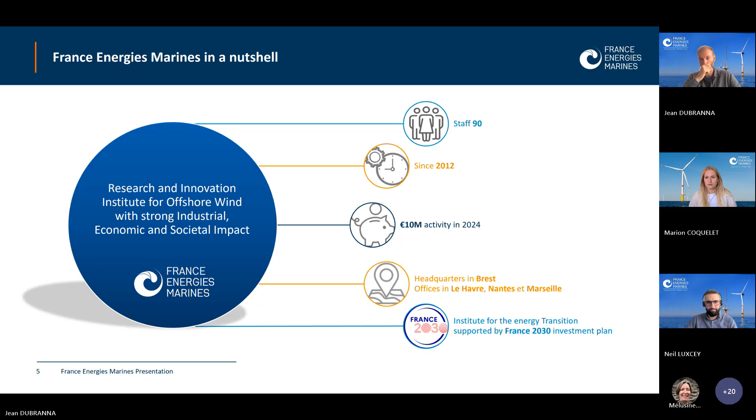In addition to those members, we also work, of course, with non-members. So anyone can join France Énergies Marines projects. That's why we have a lot of other partners in our projects from the industry or the academia as well. And we are working closely with other research institutes abroad as well.

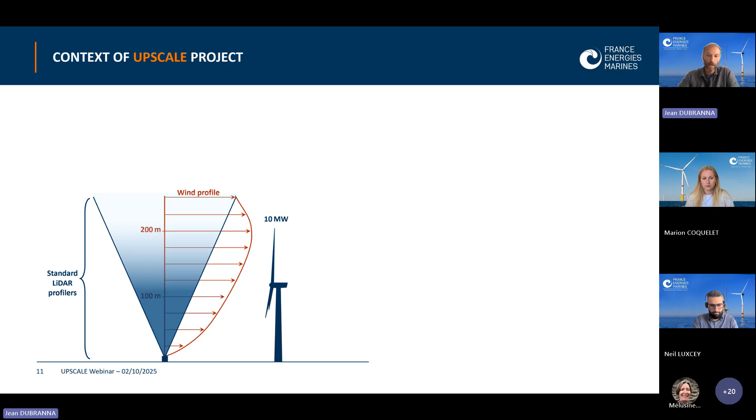But now, as the wind turbines grow larger and larger, not only do they reach altitudes where the standard LiDARs cannot measure anymore, but also where the wind profile is very likely to become more complex. Higher shear, higher veer, higher overall variability in the wind speed through the diameter of the rotor.

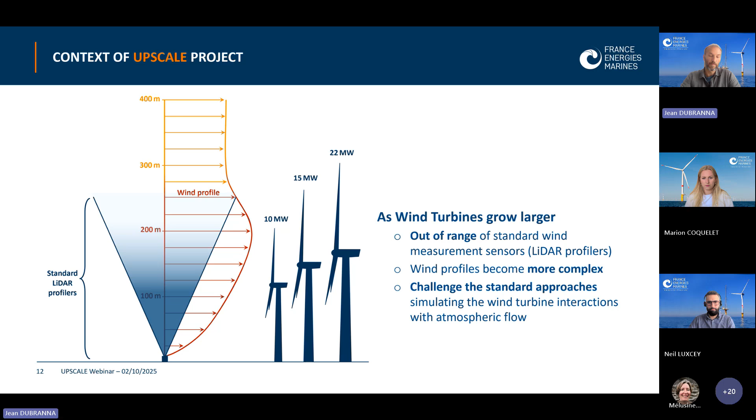This greater variability and this overall greater complexity really challenges the simplifications brought by the standard approach that simulates the wind turbine interactions with the atmospheric flow. And this is the very purpose of the Upscale project, characterizing ever higher wind profiles for accurate prediction of turbine performances.

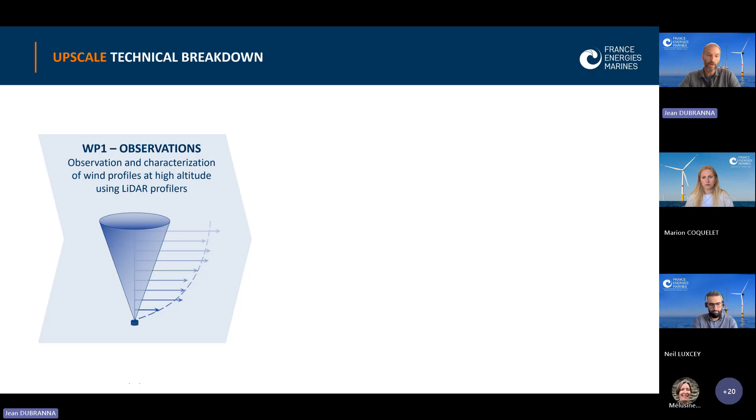Now that you have an overview of the context, let's see how we, in the Upscale project, are planning to technically address the highlighted challenges. So the project is divided into 3 technical work packages. The first one is about observations. We will use a new generation of LiDAR profilers that is able to reach unprecedented altitudes that are relevant even for the largest wind turbines.

Afterwards, in work package 2, Marion will show you how these observations will be used to reproduce realistic wind fields and wind boxes up to higher altitudes. And finally, she will present how the realistic wind forcing coming from work package 2 will be used in work package 3 to assess the wind turbine performances considering a realistic atmospheric flow.

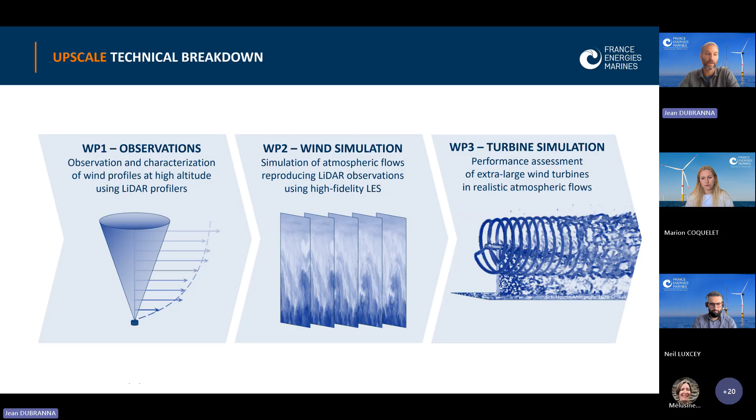The whole project is managed by France Energies Marines and is expected to last 2 years, between early 2026 and early 2028.

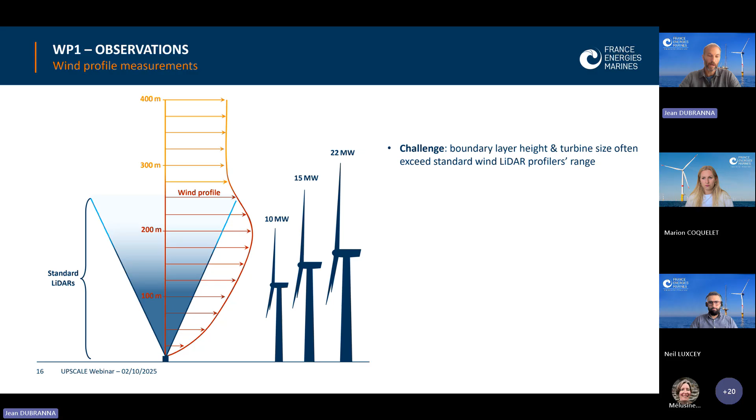Okay, starting with work package 1, which is dedicated to observations. Let's go a little bit deeper into more details. You remember that slide showing that not only the standard LiDAR profilers can't reach higher altitudes, but also the complexity of the wind profile that is increasing with altitude because we are gradually reaching the upper limit of the atmospheric boundary layer.

Well, Vaisala, who is a partner of the project and also a world leader in LiDAR manufacturing, has recently developed a new generation of wind LiDAR profilers that is able to reach 400 meters, possibly up to 500 meters, which is really highly relevant even for the largest wind turbines, as you can see in the slide. So Vaisala offered to provide Upscale with 2 of these new generation LiDARs called WindCube 2.1 XP, and we thank them very much for that.

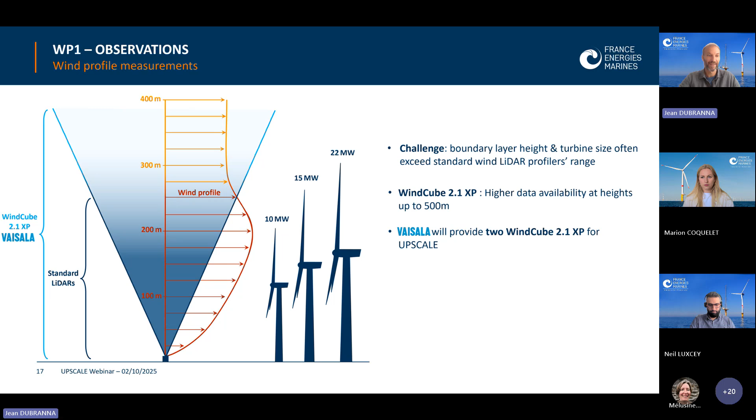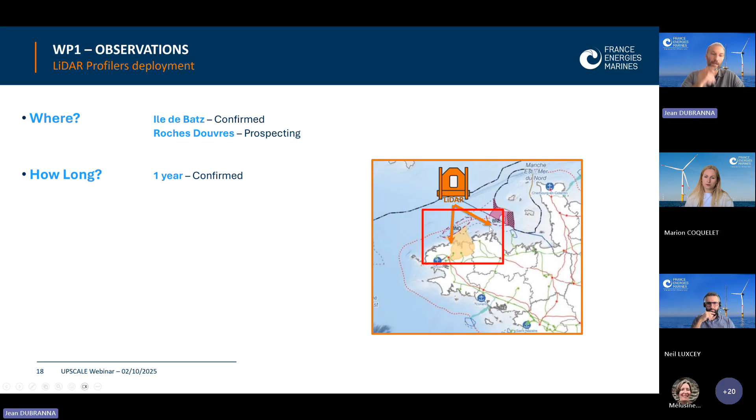These LiDARs are planned to be deployed for 1 year in the northwest of France, that you can recognize on the map on your right. So you can recognize Brittany and Normandy. So one of these LiDARs will be deployed in the lighthouse of Île-de-Batz, a little bit to the west. This position has been confirmed, and the other LiDAR is planned to be deployed in the lighthouse of Roches-Douvres. That second deployment is still under discussion with maritime authorities.

If we focus a little bit more on the measurement areas, you can realize that they have been chosen because they are located close to future offshore wind farm deployment areas, namely Roches-Douvres to the east, although it does not clearly appear on this map, it's a little bit to the east here, and also the BNO, Bretagne Nord-Ouest area, where a capacity of 1 to 2 gigawatts of offshore wind is planned to be deployed, and which is about 16 kilometers offshore of Île-de-Batz, where our first LiDAR will be deployed.

In addition, to secure the relevance of these measurements, France Energies Marines has shown during a preliminary study that there is a 0.95 correlation coefficient between the wind at Île-de-Batz and the wind at Bretagne Nord-Ouest, at BNO. So we are pretty confident that our measurements will be representative of the wind climate of the BNO area. For your information, this kind of LiDAR deployment for 1 year, 2 LiDARs, is worth about 200,000 euros, including all the mission fees, rental costs, and so on.

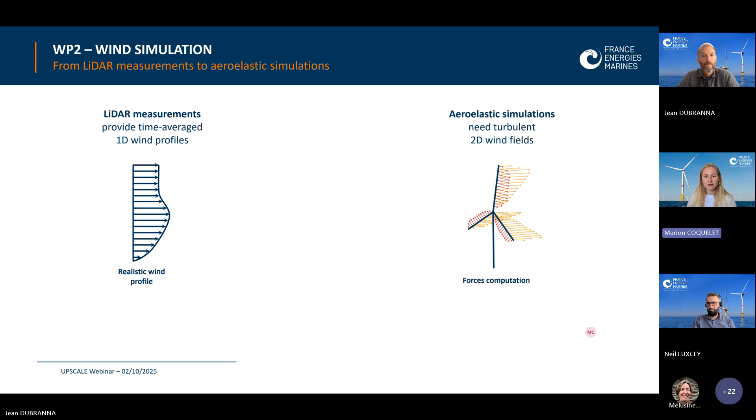So we need a 2-dimensional wind field, and we also need it to be evolving in time, so to contain turbulent fluctuations. So what's missing in between is what we refer to as the turbulent wind boxes. It's a collection of slices of wind fields that we can input onto the aeroelastic simulations. Now we have 2 options that we're considering here to generate those turbulent wind boxes.

The first one is the standard engineering approach, which consists in generating a box of synthetic turbulence. So you get a box of small fluctuations, and you superimpose those fluctuations on top of the time-averaged wind profile that you got from the LiDARs. This is quick and simple. So this is really the positive side of this engineering approach. The drawback, though, is that it's not really physically accurate. Unfortunately, we cannot just linearly superimpose fluctuations and it works.

That's not physically correct. So the other approach that we're really willing to address in this project is to rather use a higher fidelity approach. So the idea there is to say, okay, we measured a column of air in the whole atmospheric boundary layer, can we somehow simulate a full atmospheric boundary layer that would be representative of that? And to do that, we're going to use large eddy simulations. The drawback being, of course, that this is quite computationally expensive and also not that trivial to implement.

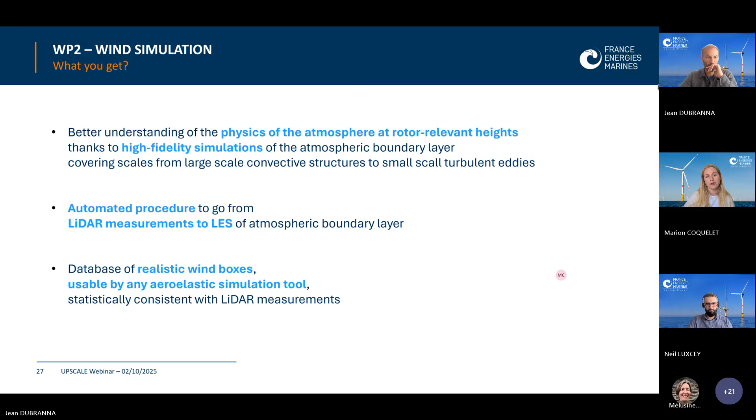Now, of course, this part here is where all the fun is. So we also want to do the exercise, and that's why we have work package 3 here. We're basically going to use all the information that we've built up to perform the simulation of those extra large turbines we mentioned in the introduction to assess their performances in realistic atmospheric flows. And the first thing to contextualize this work package, it's always the same story when you talk about simulation. There's always a trade-off between computational cost and the fidelity of the method. I also highlighted it earlier with the way to generate the wind boxes.

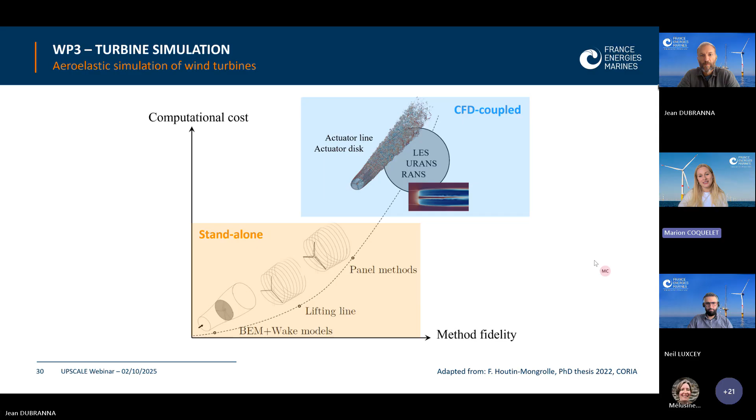And when it comes to aeroelastic simulations, I would say that there are mainly two categories. Either you have a solver that is standalone, that really focuses on the forces exerted on the blades given a specific inflow, but not much more about how the flow evolves downstream of the rotor. The other method is to use CFD coupled strategies where we have an actuator line or actuator disc that represents how the blades react to the flow, but we also have the full CFD running together to provide the evolution of the flow field. Now, again, we really want to go for this high fidelity, so of course we want to try this CFD coupled approach.

And this is what we refer to in those slides as, if it's willing to go. Maybe Jean, I need your help again. I'll try. Let's see.

Yes, perfect. So we want to go for a high fidelity simulation tool chain where we go from the inflow we just discussed before, the LES generated wind boxes. We use an aeroelastic solver which is LES coupled, and in this case we're really happy again to make the most out of the YALES2 platform. Out of that, we retrieve the whole performances of the turbine, so power, loads, but also wakes. With that, we have this whole high fidelity simulation tool chain that can provide us with reference results of how a large turbine would behave in a complex inflow similar to the one that we measured in work package 1.

Now, we understand that not everyone is willing to pay the price of the LES for every case. So we're also willing to assess what the standard engineering approach can do. We're going to be using synthetic turbulence boxes, as I mentioned earlier, as an input for a standalone aeroelastic solver. We're still open on the solver, but probably a BEM-like solver. Out of that, we get typically power and loads. We don't get the wake, unfortunately. And we can compare these results with the high fidelity simulation tool chain.

And maybe we can also do some crosses between the tool chains. So maybe we can try the LES generated wind box in the standalone solver. Is it good enough to represent the complexity of the field to get the right performances? Or is it good enough to just have a good aeroelastic solver, even if the flow field is not the highest quality? So we're really willing to challenge the standards and see what is good enough and at what cost.

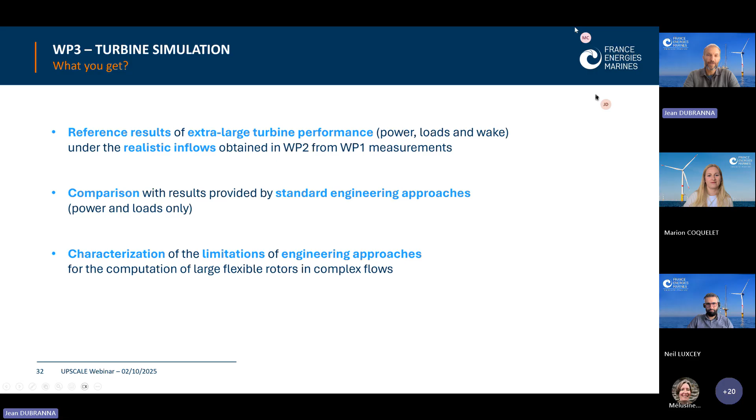I'm sure that now our audience can't wait to join the Upscale project. So let me show you how easy it is to join Upscale. So first of all, we are talking about a project of about 1 million euros. And amongst this 1 million euros, there's one part that we call mutualized costs that reach about 550,000 euros, and that is operated by France Energies Marines.

They cover basically France Energies Marines's human resource expertise allocated to the project. They cover service costs, possible investments. We also have a postdoc that is budgeted in the Upscale project, and of course the measurement campaign that was presented in Work Package 1. To benefit from the outcomes of the project, our partners are requested to financially contribute to this mutualized cost part.

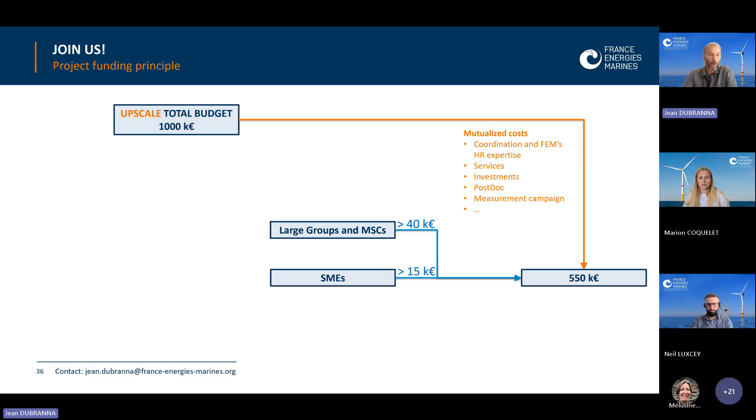In more detail, each large group and medium-sized company is expected to contribute at least 40,000 euros to the mutualized cost, and 15,000 euros from small SMEs, through basically cash contribution. Now, there are two good news. The first one is that for French companies, your financial contribution can benefit from a Crédit Impôt Recherche.

The second good news is that as long as the total amount of our private partners' contributions reach more than 150,000 euros, then the French government complements up to 550,000 euros through the France 2030 investments plan, because France Energies Marines is an institute for energy transition and can benefit from that investment program.

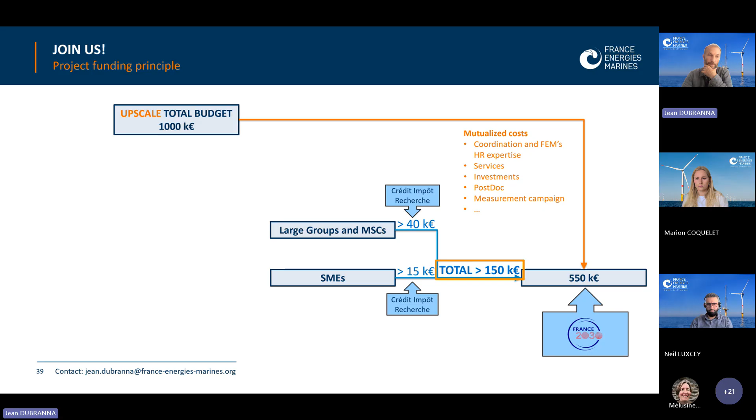Basically, if we want to make it short, the total budget of the project is about 1 million euros. France Energies Marines operates 550,000 euros, including the France 2030 investments, and the cash contribution expected from our private partners is 15,000 euros from small SMEs, PME in French, and 40,000 euros for large groups and MSCs. Part of this cash contribution can be covered by Crédit Impôt Recherche.

So basically, through your contribution to Upscale, not only can you very strongly leverage the amount of your financial contribution, because France Energies Marines has a special status of Institute for Energy Transition, but also can you benefit from the outcomes of a 1 million euros project.

So to finalize this presentation, I'd like to give you a short reminder of what you will get by participating in the Upscale project. Work Package 1 related to observations will provide you with a unique database of wind profiles close to future offshore wind deployment areas at altitudes that are relevant even for the largest wind turbines. It will also give you an innovative procedure to infer the local wind profiles from distant measurements. And for this work package, we receive very significant support from Vaisala, and we also benefit from the outputs of previous research programs from France Energies Marines.

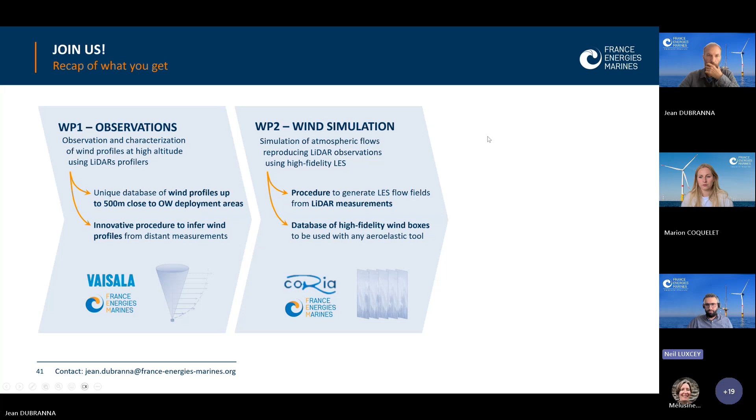So Jean, there are already some questions in the chat. First there is a question from Marc Guyot about when Marion was talking about a standard engineering approach and synthetic turbulent box. Do we mean modeling wind using TurbSim, for example? So yes, that's what we're referring to. We're open on the software. I think this is not decided yet, but this is typically TurbSim-like tools.

Yeah, thank you, Marion. Another question from Frédéric from Vaisala. I understood that one input for the simulation is the shear profile. Is the TI profile also considered?

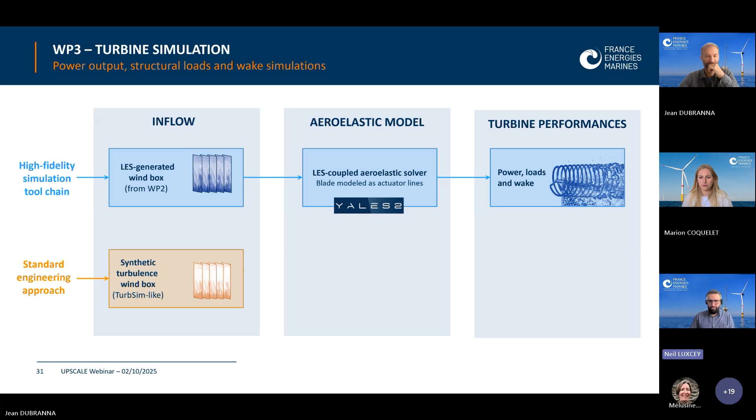For me or for you, Jean? Regarding the TI profile, well, I'm not sure if Maxime is connected to the webinar. Oh, but maybe he doesn't have his microphone. We've been discussing quite a lot about the turbulence profile. Yeah, indeed, there are two different ways of characterizing the turbulence profile, with one single lidar or two lidars. And Jean, I'm here. Okay. Sorry. Excellent. Okay, so Maxime will answer this question.

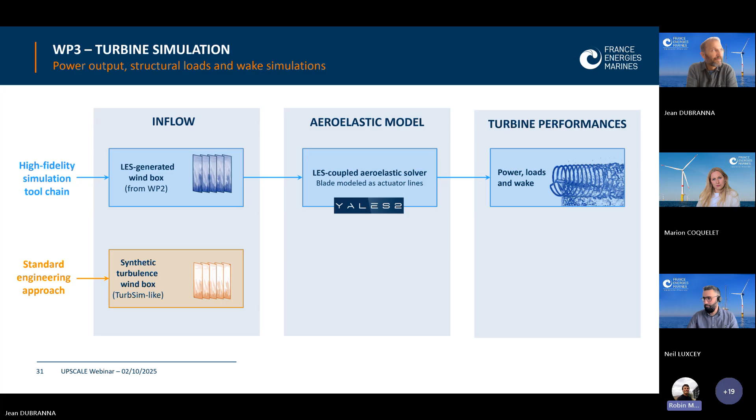Thank you, Maxime. Yes, so we have developed a way to measure turbulence profile at France Energies Marines, but the requirement is to use two WindCubes to form a dual lidar setup. With this, we have only one source of error instead of three when we are using one lidar, one WindCube in particular, or any other actually. So yes, it could be a good opportunity to use this setup at Ile de Batz, but actually it's up to you, Jean, who decides whether we are using two lidars at one site and we will be able to get proper TI, or if we have two lidars, another solution will be to deploy the lidar at two different locations, and if we decide to go for this solution, we won't be able to provide proper TI profiles.

So yes, indeed, we are currently considering two different deployment areas for the lidars, because we would like to have two representative lidar measurements for two different offshore wind deployment areas. But as I was mentioning, the deployment at Ile de Batz is confirmed. The deployment of the LiDAR at the Roches Douvres is still being discussed. And in case the second LiDAR cannot be deployed at Roches Douvres, then we would go deploying two LiDARs at Ile de Batz in a dual setup. So we would be able to make high performance TI measurements.

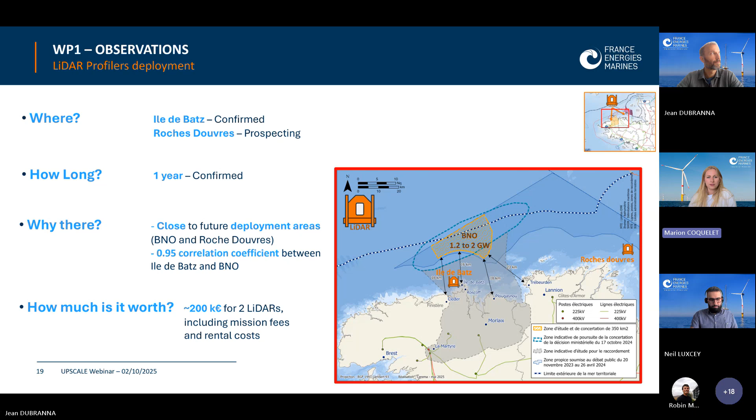Thank you, Jean and Maxime. There is another question in the Q&A from Loïc Scouff. Would the calibration of the LES simulation be based on the original LiDAR measurements at Ile de Batz or the adjusted measurement to BNO location, inducing additional uncertainty? I think that one is also open. So that's to be discussed. Indeed, we agree on the fact that if we go for the BNO location, we add a step, so we add uncertainty. I think the key thing really of work package 2 is to manage to develop a methodology such that at the end of the day, you just want to reach a profile and you can reach it. Now, if we decide to do it with the Batz Island or with the BNO site, we can go for it. That would be my answer.

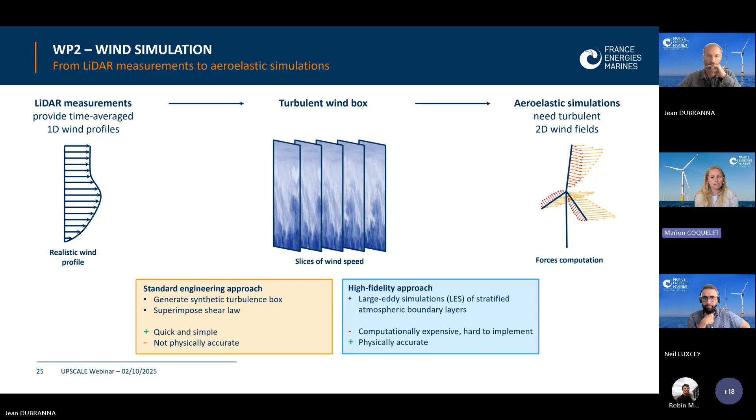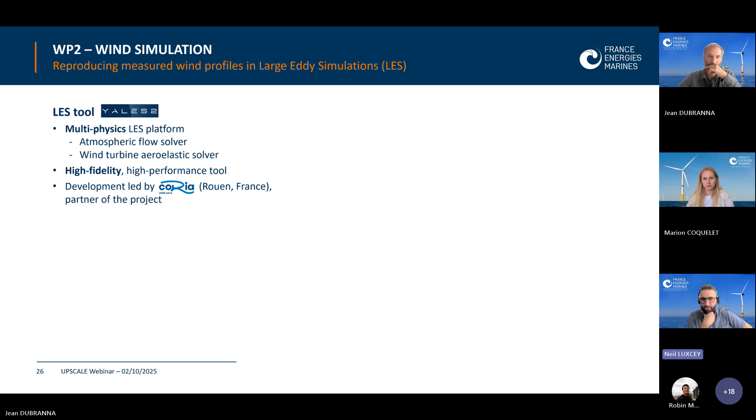Okay, thank you, Marion. And the second question of Loïc is probably addressed to Robin. Also, how is the adjustment between the LiDAR measurement and the offshore wind farm location handled at high altitudes where no measurements are currently available? Thank you, Neil. So I'm not exactly sure I understand the question. We are working on this extrapolation question within the NEMO project already. And the idea is to use numerical weather prediction to correct them with existing LiDAR measurements and then to extrapolate with uncertainty estimation to other locations. And the idea is to use deep learning models to ingest maximum amount of explanatory variables, environmental variables, to explain the differences between the coastal and offshore locations. So this is really ongoing work. So I cannot be more specific than that for now. Okay, thank you, Robin.

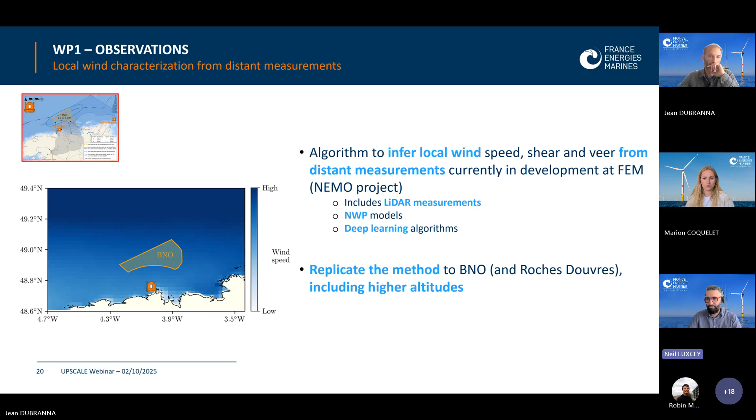I cannot see any more questions in the chat. Maybe I can add that if your entity is interested in joining the project, then we expect an email from you by the end of this month, and the firm confirmation within 2 months from now. That will be kind of the schedule that we need to follow. So don't hesitate to send an email to Jean, and I guess you have the email on the screen right now. Yes. Any questions? If not, then...